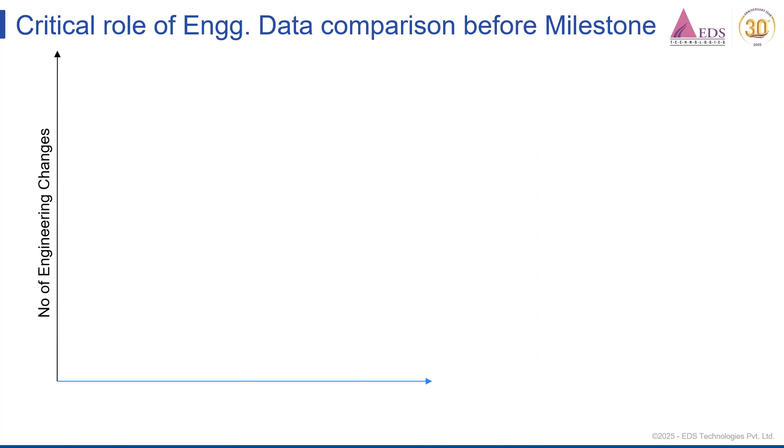I will take you through today's topic of the discussion about XCompare. We will do a technical presentation for that, and it will be followed by a demonstration on the tool by Pranay. So let's start. Yeah, so we will see what is the role, how is the role critical of the comparison for engineering data before the milestone releases. So on the y-axis we have a number of engineering changes in quantity, maybe 100, 200, and on the x-axis we have product design maturity gateways and stages.

So usual gateways are like product confirmation. Then we have virtual 0, virtual release 1, virtual release 2. Final data judgment, that's also called tool kickoff, validation prototype, production prototype, and SOP, that is start of production. So as usual, in any product system, we have these milestones where we have to have certain maturity of the data. So as you see, this is an important milestone in any engineering data or in the release. It's called tool kickoff or the FDJ. So it's everything digital here and everything physical afterwards. So this is a very important milestone.

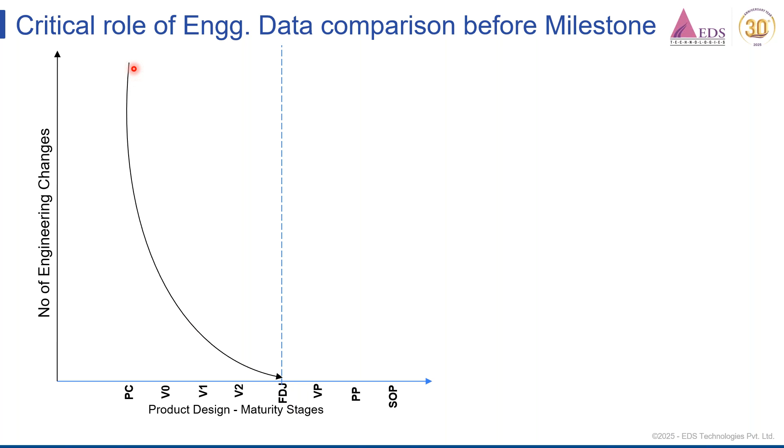All our changes are supposed to diminish as and when we approach the FDJ. That is a normal expectation, and it's a very important expectation. It is usually expected that all changes should diminish, should settle or close or resolve by FDJ. And then with that, we go for the actual tool production and prototyping, etc. However, it's a very idealistic condition.

So we have on another axis the cost of incorporating a design change between these milestones. So we see the graph is the other way. If we have to incorporate any design change at the very early stages, you will consume very low cost. But as and when you have more changes after FDJ or tool kickoff, we'll see how the changes appear. So the cost of incorporating a design change is really substantially very high once you pass this gateway.

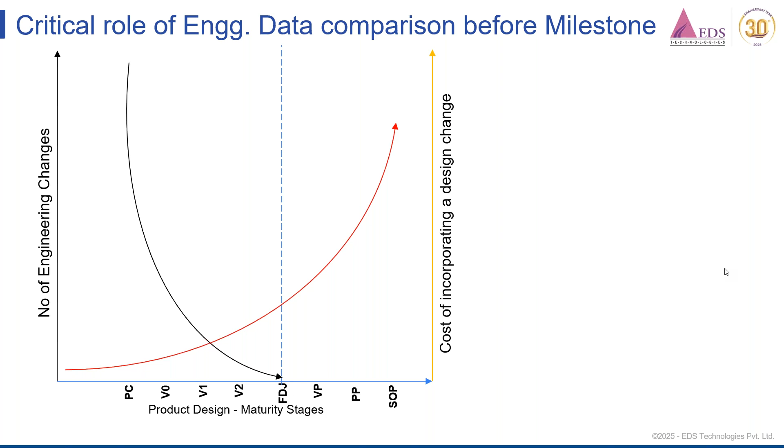So XCompare will help you quite a lot in this digital phase, where the trend curve is expected like this, not like this. So we'll see how we can achieve this important phenomenon with the help of XCompare. We'll see what are the sources of engineering changes.

There can be some leftover design decisions which are not judged very important in the early stages. Such design decisions are then multiplied and they become very big in nature. There can be some packaging surprises, and the packaging surprises can become bigger. The item LWH or the box sizes can shrink or can become bigger. That will be a big surprise.

Then there can be a lot of attribute changes. Maybe you are targeting Indian specific markets, but now there is a decision from the management that you target South Africa also, or maybe Europe or America. So then certain changes come into your product design accordingly. Then there can certainly be regulatory changes, some regulatory failures may occur. You have to reiterate your design, make the changes, and then fulfill the regulatory demands. These changes can appear due to that.

And also due to crash, durability, NVH and many other things, there are recurring changes that always come in the design that we have to meet. So in all these we have to compare the previous design with the new design, where the XCompare tool will help you in great detail. Apart from that, cost reduction is always an ongoing activity in any company, where you study previous data and new data and find out ideas for cost reduction.

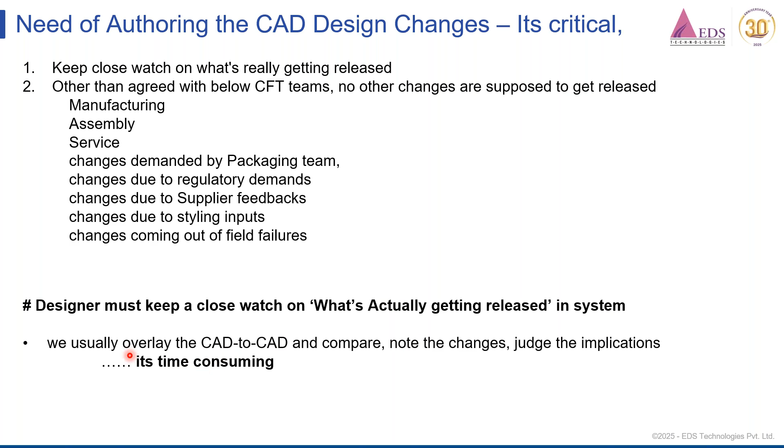How we usually do it is we overlay the CAD for a CAD to CAD compare. We overlay the previous CAD and the new CAD and compare them, note down the changes in the new design, judge the implication of that design change, and then go for actual tool corrections, etc. But it's a highly time consuming activity. It's a subjective activity. One component will take a certain amount of time, and 100 components will take 100x time. So it's not a good scenario.

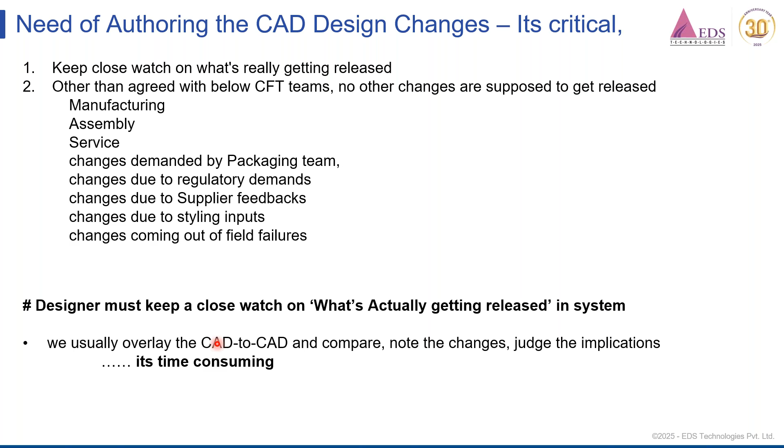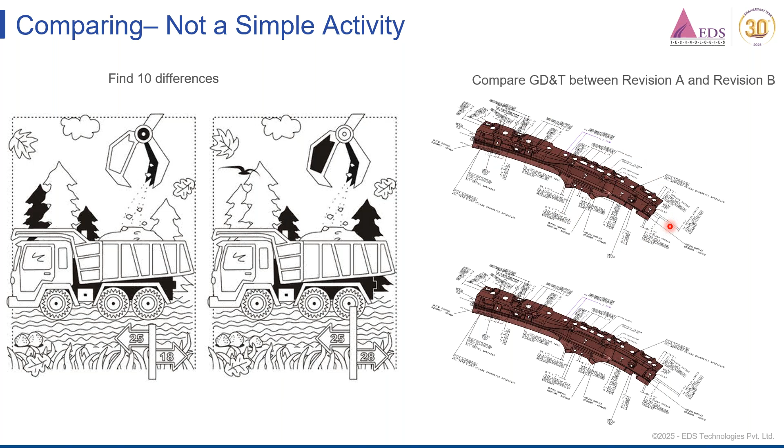That's for a simple drawing, but if you have to compare an engineering drawing, where there are a lot of geometrical callouts and intricate shapes in the component, then comparing becomes a really tedious and time-consuming job. And a lot of errors can also happen due to the large volume of checks or comparison elements.

Similarly for drawings, if I have another drawing with a revision A, the first one is the new release. So this is new, this is old. If I have to compare them vis-a-vis, I have to compare each and every dimension of the view successively and find out the differences. But that's not a smart solution. XCompare can provide you that smartness to compare automatically and give a dynamic report where all the changes will be brought in front of you.

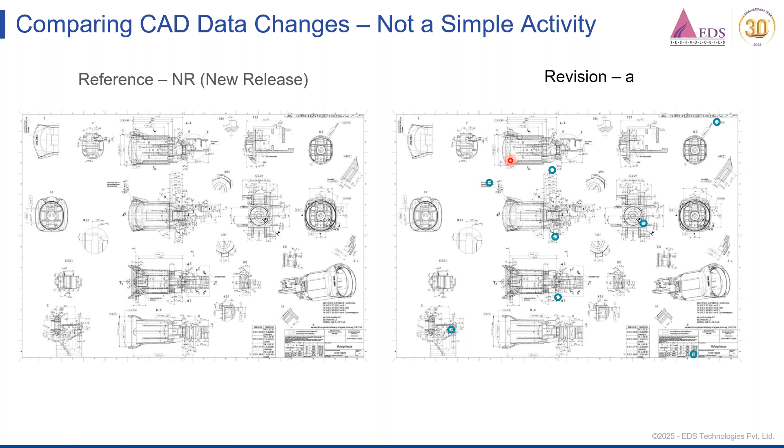Similarly, XCompare can be used for assemblies. Assemblies may be very small scale or very large scale, up to the vehicle integration level, where you are integrating different aggregates, for example the powertrain, the body, the subframe, the electrical harness. There the complexity really increases, and vehicle integration engineers are really stressed due to that high amount of data.

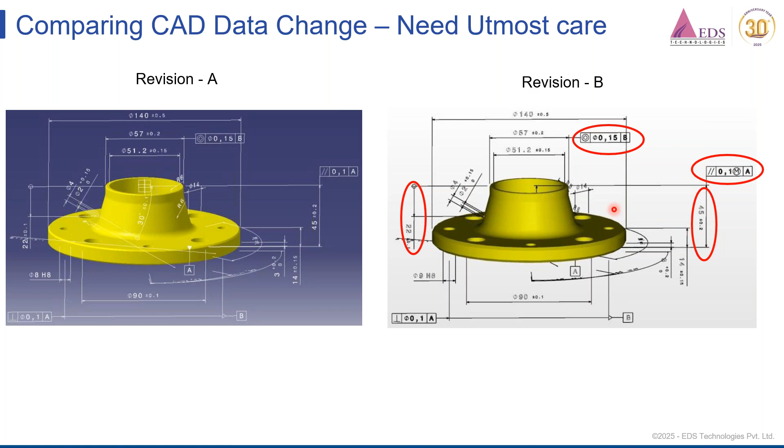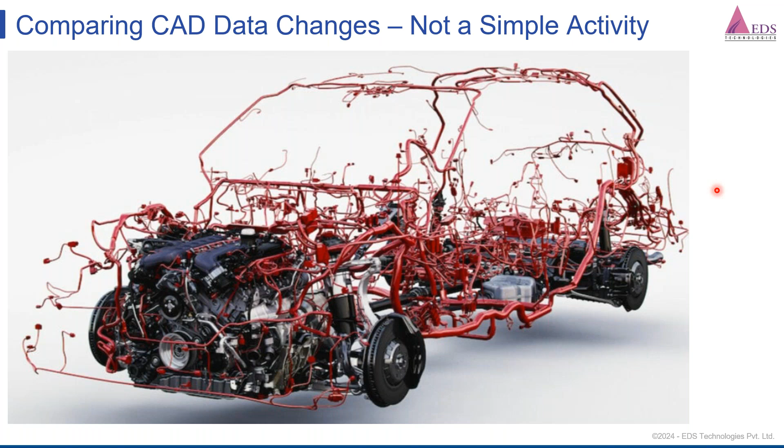Now the complexity greatly increases if it's at complete vehicle level, for example, the harness, the main bundle, the sub bundles and the branches. It becomes a nearly impossible activity to compare and see what the changes are with the new release. There can be some changes in certain areas, but how to find out? Not just by overlaying, but by using Xcompare, we can really make our life easy.

So there are some typical use cases where we compare the data with the previous revision. For example, the 3D master, where we compare release by release and version by version CAD data to know the changes. We also compare when we go for design reviews. We always have to have a good idea of what design changes we have made in our releases. Then when we give any data to tooling departments, we have to compare it with the previous revision. When an OEM gives the data to a supplier, the supplier is also supposed to make comparisons with the previous version data.

Then of course in the redesign of parts, where you are remastering or reverse engineering the parts, you have to compare the data to 100% geometrical accuracy, and then you go forward. And there are some data translation issues that may also arise. We'll see a couple of them in the successive slides.

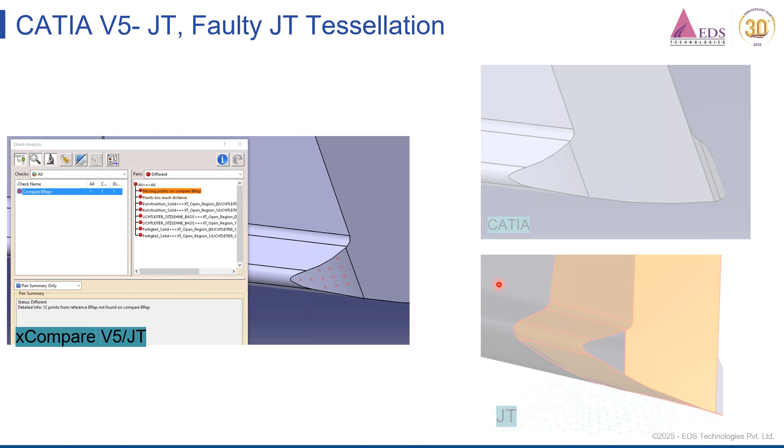So Jupiter Tessellation, what we call JT, is a great tool. It's really lightweight, but it has certain drawbacks also. Not all the time does it work 100%, because for this particular element, which is curvilinear, JT tessellation can make a flaw here. It can leave this empty. Such errors can be noticed with the help of Xcompare.

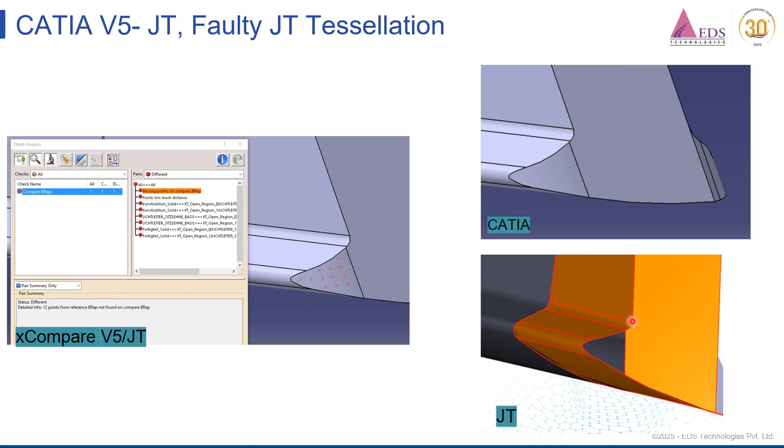Similarly, this is again this area. Once this CAD part is converted into a JT, it will not be converted 100%. Some stray surfaces will pop out in some areas, which is not a good condition. So Xcompare can easily check these flaw conditions here.

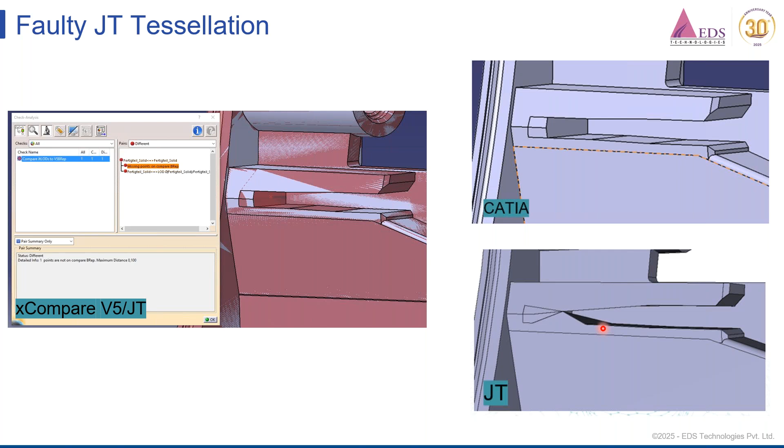Again, this slot here looks like an injection molded component, but due to JT tessellation, the data has become unwanted or some different form, which is not the correct data and can't really be used by any supplier. So we can always compare the data this way, to see whether JT has made any problems to our data. So that comparison is very important.

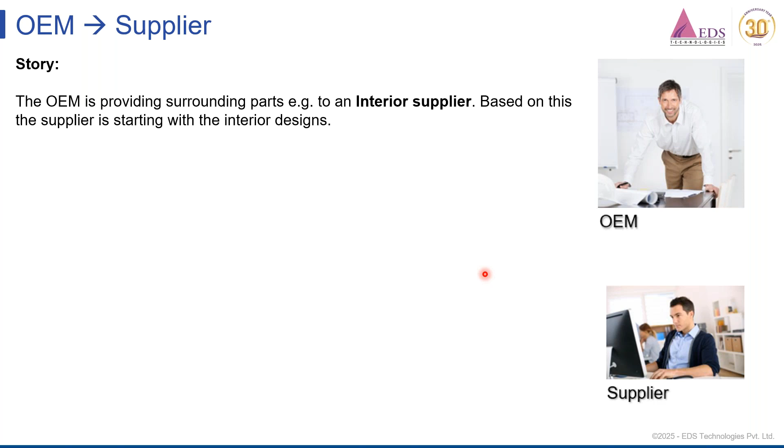Again, we'll see one slide for when an OEM sends the data to a supplier for their designs. The usual task of the supplier is to identify the changes between the current data and the new data received from the OEM, then get a clear idea of how many components are added, removed, and if their position has moved. They have to get a good idea of that. Estimate how this affects their interior design, that is the judgment stage, and whether there is any major positional change in the data.

All these changes take time if we do it manually. But if we do it with the help of Xcompare, it can really make our life easy, and it can be done extremely fast, unlike the manual process.

Similarly, for remastering, as I said, there can be some remastering errors where we have to compare our legacy designs to new versions of CATIA or NX, and we have to remaster the scan data to make a parametric model out of it. So we have to 100% match the scan data accuracy with the remastered model, where Xcompare can really help you meet 100% geometrical compliance with the scan data, or even with your legacy CATIA V4 or NX data.

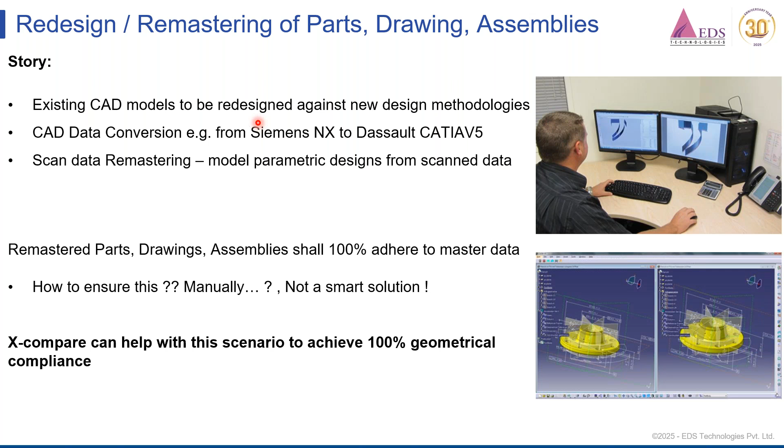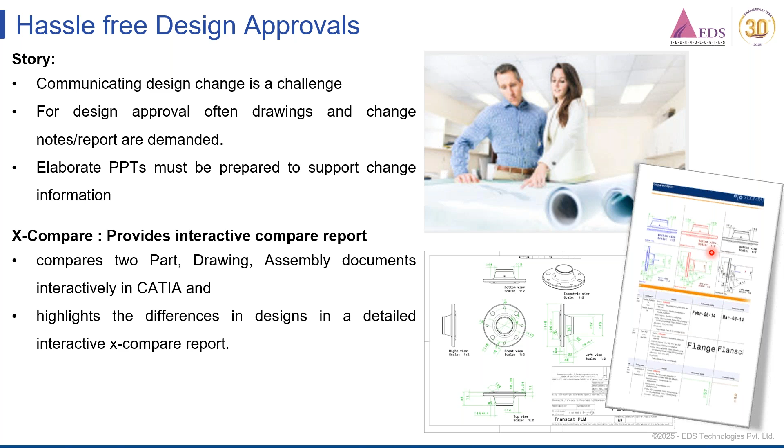But with the help of XCompare, you can generate such beautiful presentations and reports automatically out of the application, nicely staggered, nicely formatted, and then you can attach these to your design change approval sheets, and you can face those meetings quite confidently with the help of the XCompare application.

Some examples we'll see; however, Pranay will take you to the actual presentation. So we'll see what the typical checks are. Here, what XCompare does is it brings two screens before you in a staggered way, and it compares. This is the old revision. This is the new revision. In the old, it was aluminum material, and it is iron in the new version. So XCompare can really compare, and it can find these differences in the structure generation and in the assembly also.

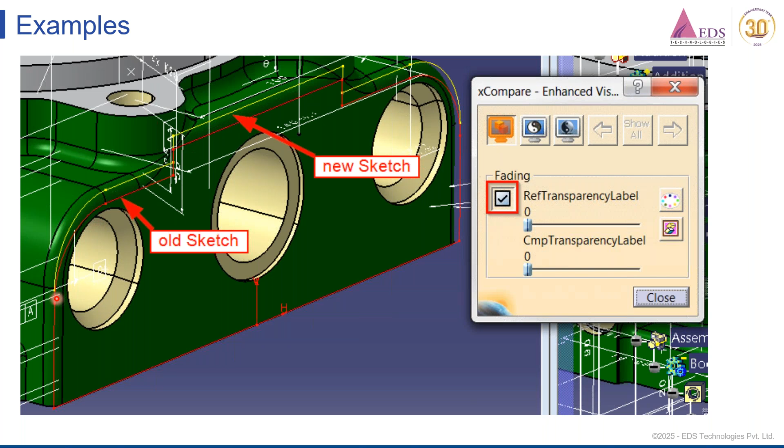Similarly, there has been one sketch geometry change. For example, this yellow and red. The red is the old and the yellow is the new. XCompare can overlay these onto one another automatically, just like the way we do, and it can give you a good idea how the sketch has changed over the releases or revisions. Again, if at any point while creating the sketch any geometrical elements have changed, even that data comparison can be provided with the help of XCompare.

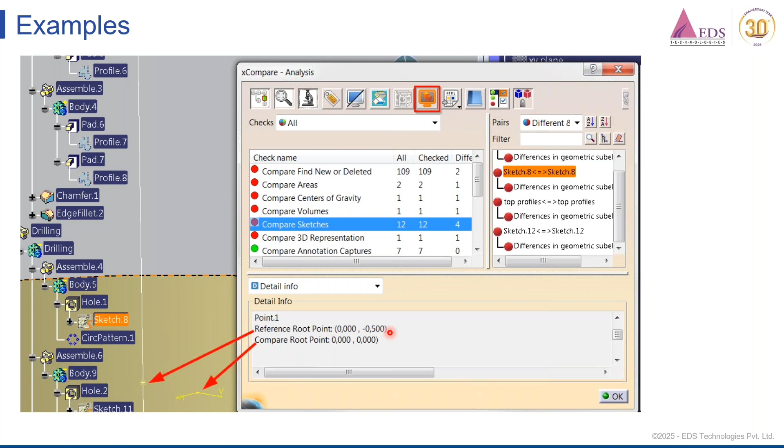What it does is, just like we overlay the designs, XCompare can give you an overlaid stage populated with color codes like yellow and green here. Green are the missing in the reference, and yellow are the new in the compare module. So these changes are available, and you can switch off the nominal geometry and just see the additions and deletions right on your CATIA screen for better explanation.

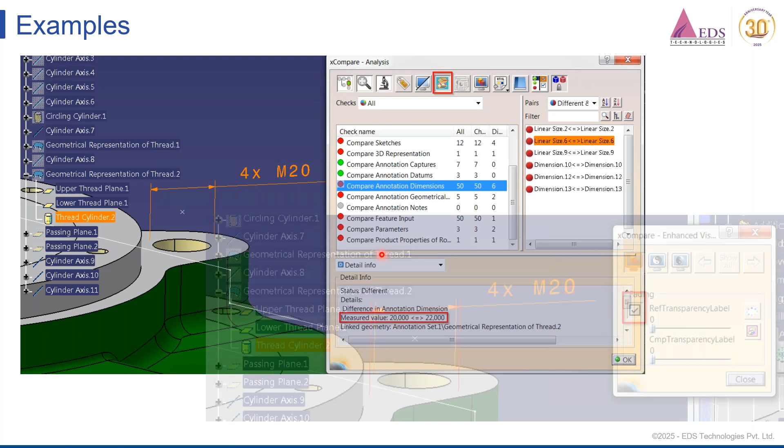Again, here we see it's also equally important for geometrical tolerances. It can compare your tolerances. For example, this hole in the new revision has been made 22 diameter. However, it was 20 mm in the previous revision. So such changes from revision to revision can also be mapped with the help of XCompare. Again, here we'll see there are 4 holes of M20, but they have been made M22 in the new revision.

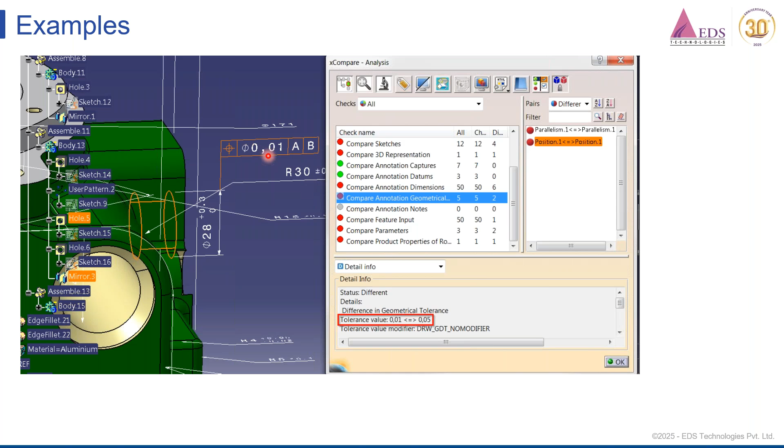So it's an extremely smart solution. It's a very fast application. It compares the data quite accurately, 100%, and with great speed. Again, this thread depth was 22 in the new, and it was 20 in the old revision. It can check blind hole depth also.

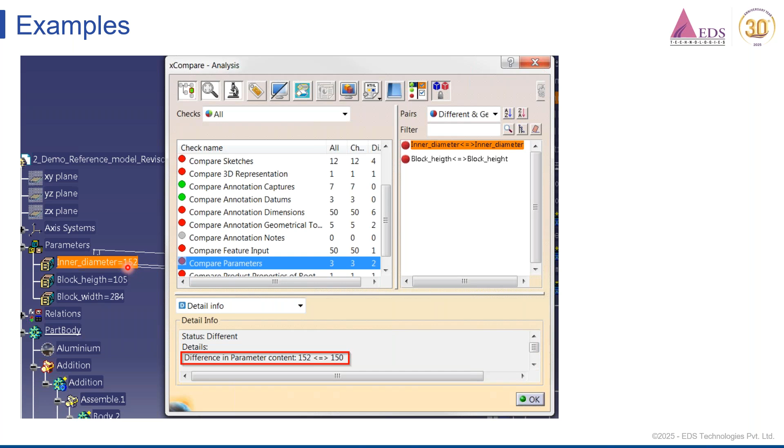Even not just the geometrical data, but the parameter data it can also check. Like this parameter of inner diameter was 152 in the old revision, and it became 150 in the new revision. So such changes can also be tracked with XCompare. And at the end of the comparison, there are some readily available reports which you can run and see. What we are looking at is a three-dimensional HTML report. It works on all browsers.

In the browser itself, you will be able to zoom and rotate the model. You can cut sections of the model in the principal axes. You can zoom it, rotate it, and know the changes right on screen without any need for a CAD tool. So it works on a general browser like Internet Explorer or Chrome.

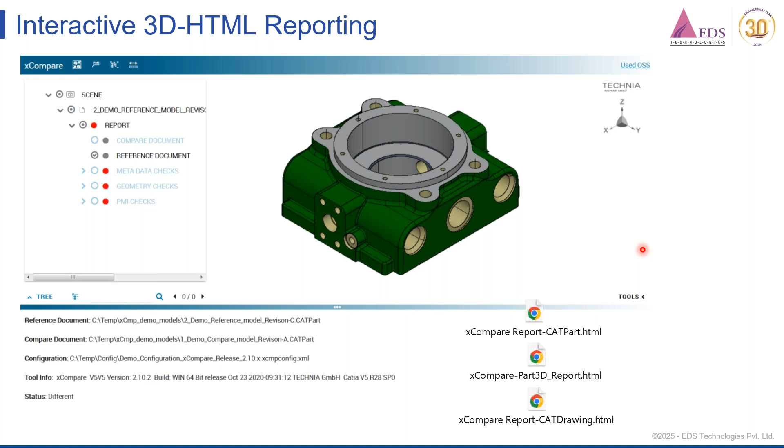So with this, I will hand over to my colleague Pranay for the demonstration part of the application. Over to you, Pranay. Yeah, thank you, sir. Thank you very much.

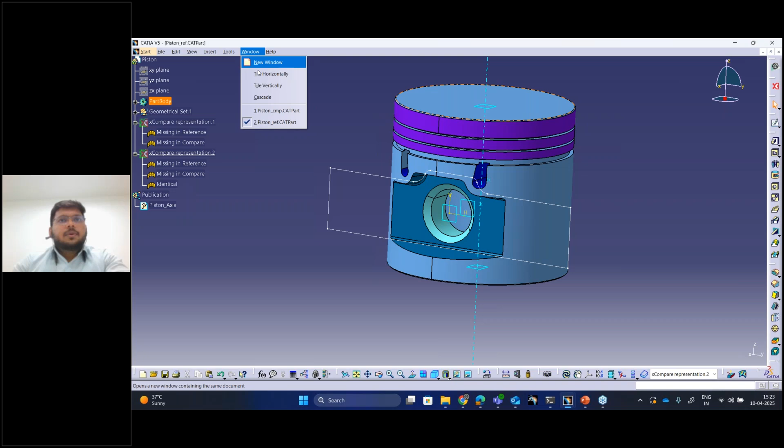What I will do is just make it tile vertically. This is the piston CATPart. This is the reference and this is the compare. I will explain what the reference and the compare actually are.

I will go here in this toolbar and launch the XCompare. A user-friendly dialog box will appear at your end. This is just an interface of XCompare, how it looks. You have to go here in the XCompare and specify the documents which are the reference as well as the compare.

The reference will be the old CAD part, or I can say revision one, and compare will be the new CAD part, or new document, which I can say is revision two. So we have to browse the documents here.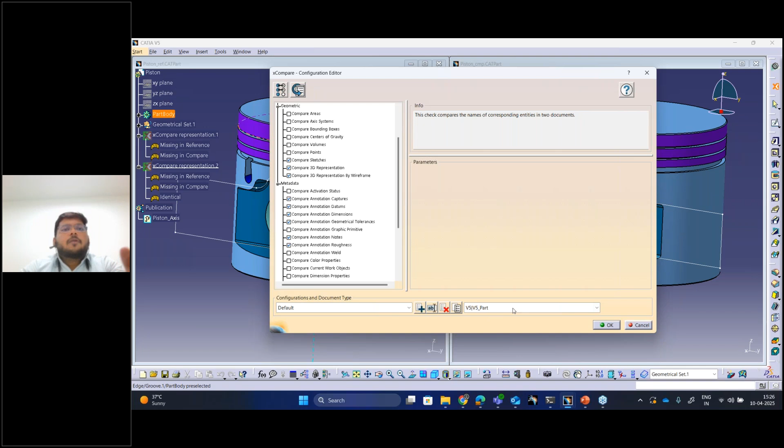After selecting the number of checks you want — for example, out of all of this you've taken a certain amount, let's say 10 checks — you do that whole set, then save it and click OK. That many checks will get activated here, and after that you click OK to start the comparison.

I have chosen these two cat parts here, and I will click OK. In just a couple of minutes, you will have the report as well as the comparison results. So it is now comparing both the documents, both the piston parts.

So it is a familiar tool. You will like it, it will take a day or two to get hands on it.

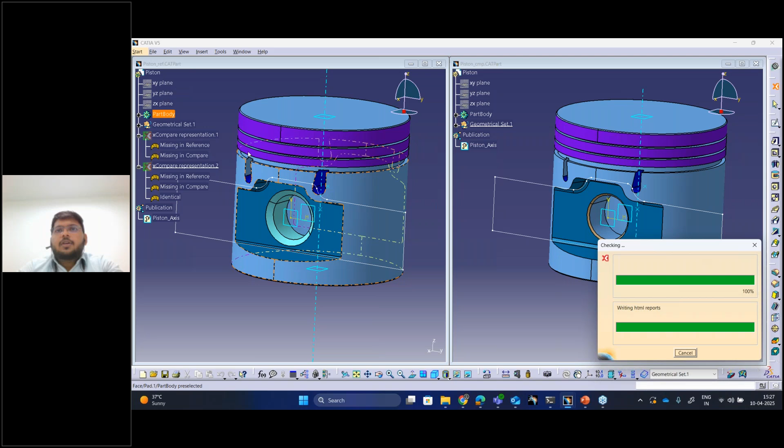Okay, so this is the result. After the comparisons, you will get all the results here. These are the checks I have checked in for that configuration, and here I have got the result. In this check you are able to see all equal, different, and general error. Now all the checks have appeared here.

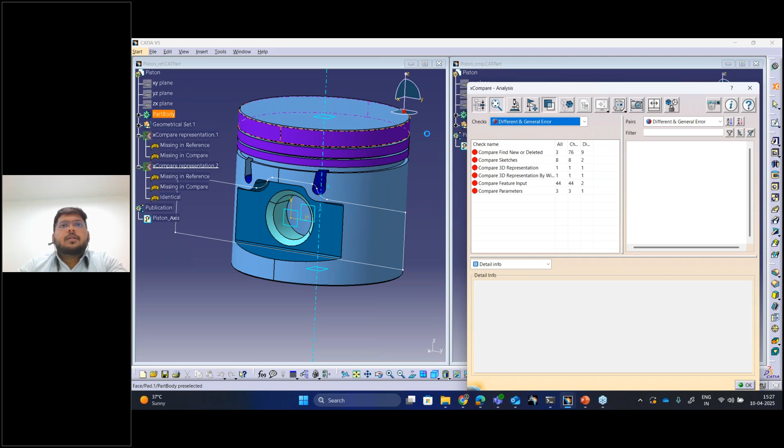If you check equal checks, if there are any equal checks that the tool got between the reference document and the compare document, the equal part, like the geometrical set, will appear as green here. And if there are different checks, like different comparisons or geometrical checks, we can differentiate from here. So these are the differences that Xcompare found in both documents. I will just take you through this.

Okay, so here I have both the documents open. I will just check it, make it transparent, and log it. So here for example, the first check I have here is compare find new or deleted.

So whenever Xcompare is going to compare, for example, the thickness, you are able to see that thickness 1 is present in the reference document, and it directly gets highlighted here. You can also check that whenever I am moving this part, the compare part or revision 2 is also getting moved or panned. So this is a feature of Xcompare.

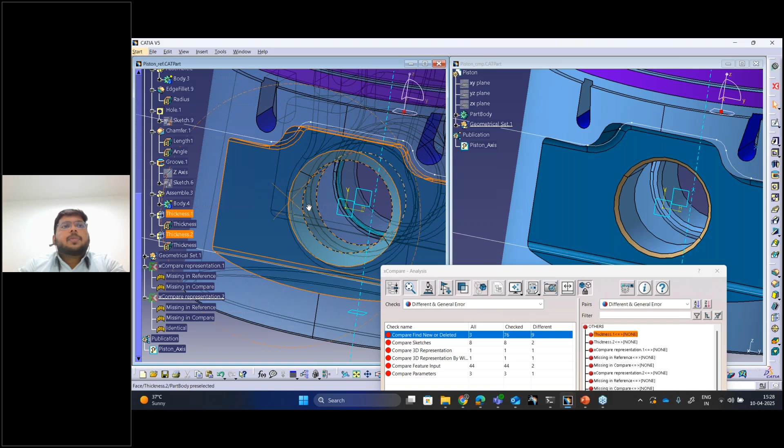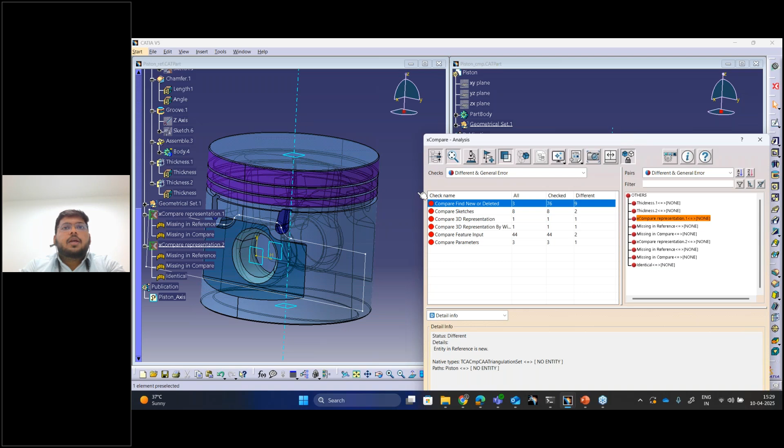We are able to see that this thickness 1 is present in revision 1, but not in the new document or new revision. It is thickness 1 here, and none represents that there is no thickness present. Similarly we have thickness 2 here, and Xcompare represented that as the geometrical set. This is the geometrical set we have in the compare reference document, but not in the compare document. If it is there, it is going to be highlighted here directly.

For missing in reference, this is another geometrical set which is present in the reference, the old cat part, and not in the new one. Similarly after the checks, detailed info will be present in this dialog box. Entity in the reference is new, which means the geometrical set is present in the reference document but not in the compare document. So these are some compare find new or deleted geometrical sets which we got here. Whenever you click that, the representation will be there.

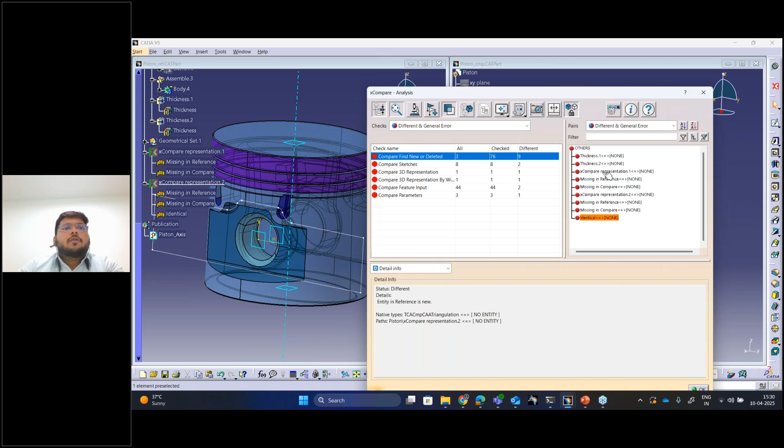Then we have the compare sketches. In compare sketches, for example, Xcompare is saying the check name compare sketches and check status is different.

Pranay, we are not able to hear you. Pranay, we can't hear you. Hello.

Yeah, please go ahead. Sorry for the disturbance, okay.

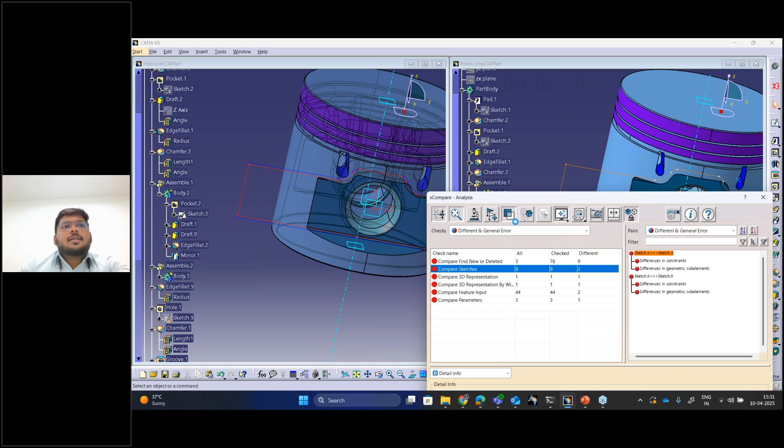So yeah, this is the compare check. So here I have this, for example, just a second. Okay, so let's compare and check the result, and you're able to see that the red one which is showing here is in the compare document, and the blue one is from the reference document.

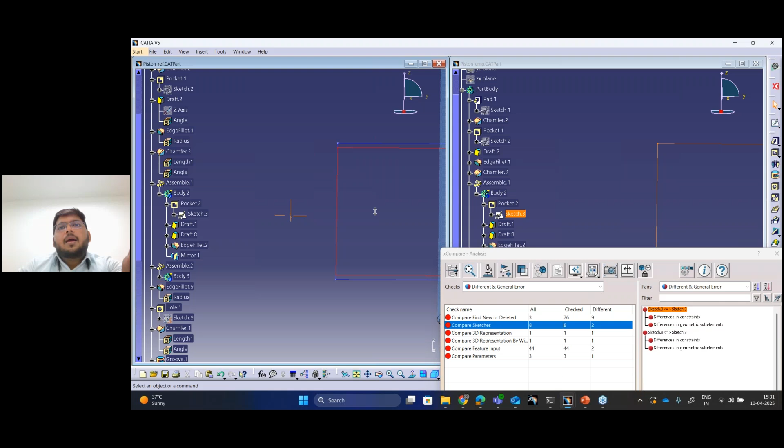So certain changes are there, revision changes, and compare found it. I can say the height or the length of this sketch has been reduced in the new revision. If it is done intentionally, then there is nothing to worry about. But if it got changed unintentionally, by mistake, you can rectify it, you can correct it. So this is the advantage of compare.

Then afterward we have the differences of constraints. Certain constraints are in difference here.

For example, it is highlighted here, and we also have these differences in geometrical sub elements. Okay, so you're able to see these certain elements which have been highlighted. Then in sketch 8, we have certain differences. For example, you are able to see here, let's see, this is the sketch.

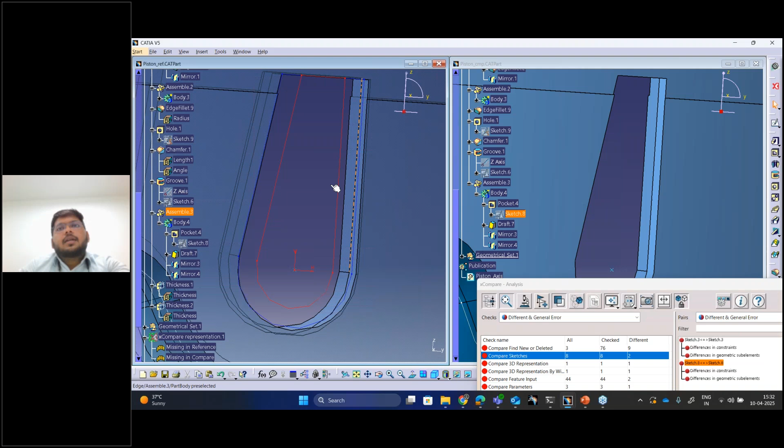Just a second. So in the reference, that is the old cat part, we have a bigger pocket here, okay, this. But in the new revision, it is small as compared to this old one. So the blue one gives us a representation for the old cat part, and the red one represents the measurements for the new revision, or the compare document here. So this is how it gets highlighted.

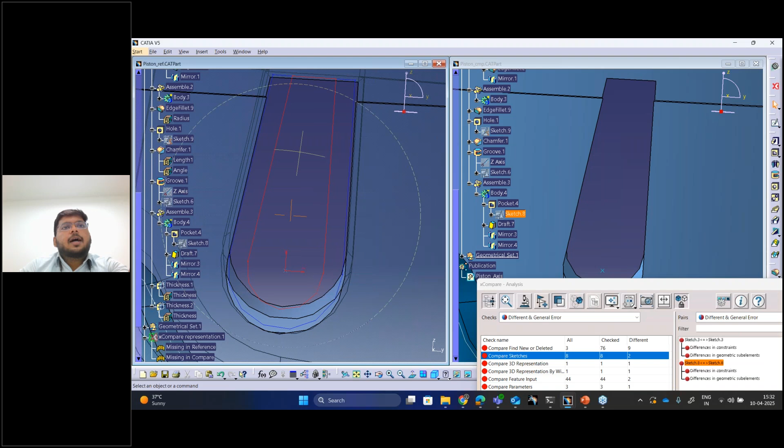In this part, actually directly in the part that is being seen. So this is one of them, then we have this compare 3D representation. See, for example, you're able to see what we have done for pad, pocket, and all the features we have applied. So in this old CATPart, we have a bigger height of the piston, but in the new cat part, or the compare document, the height is reduced. So directly it will be demonstrated in this cat part. The red one is for the compare, the new document on the new cat part. The blue one shows us the old cat part.

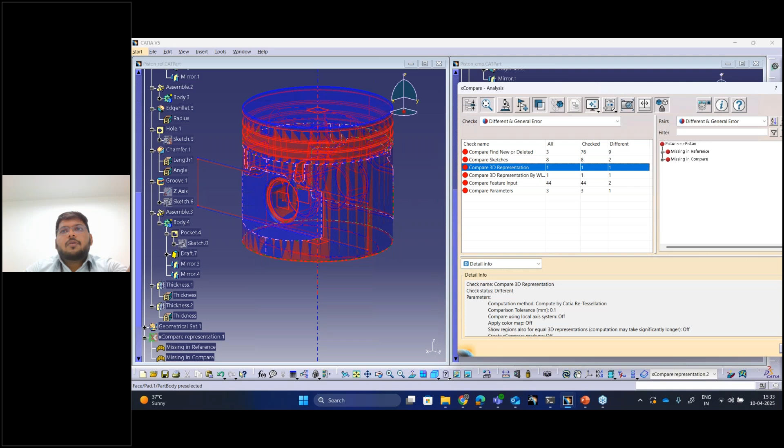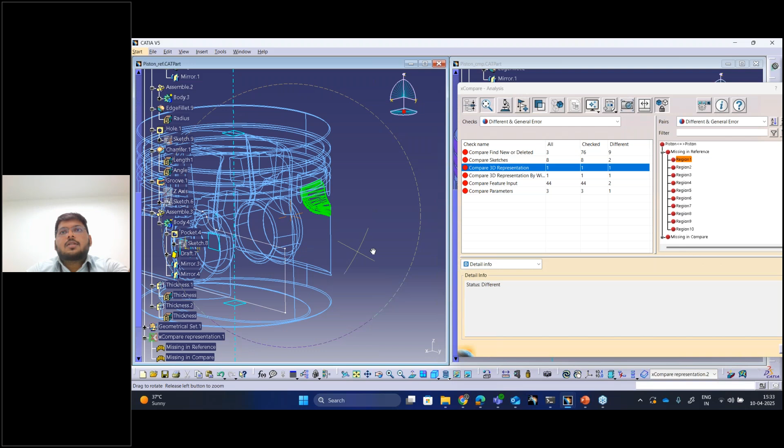So if I want to see what parts are missing in reference, these are the regions, for example, missing in reference. To show it, I will just toggle this, so I have to go to wireframe. So this region is missing in the reference part, the old cat part. Okay, so another region, region 2, this region is missing in this cat part, old one. This third region is missing also. And many more, for example, here it is found that 10 regions are missing in this reference document. So this one also.

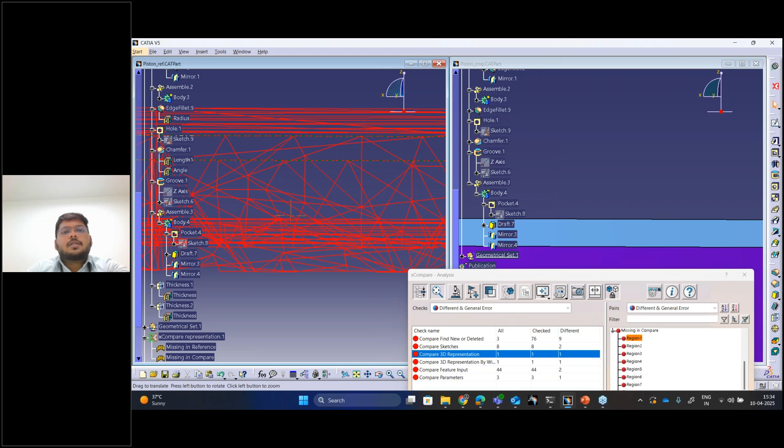But there are also certain regions which are missing in the compare as well, so we have also got the result for it. What I will do is just go here and write. So as I told you, the red highlights the new revision. So this region, for example, if I just zoom in here, you are able to see that this height is more compared to this one, of thickness applied, or it has been pocketed. The height has been reduced here. You're able to see, for example, if I just toggle to the view, so you're able to see, you can see the difference between the heights. xCompare has highlighted that as well.

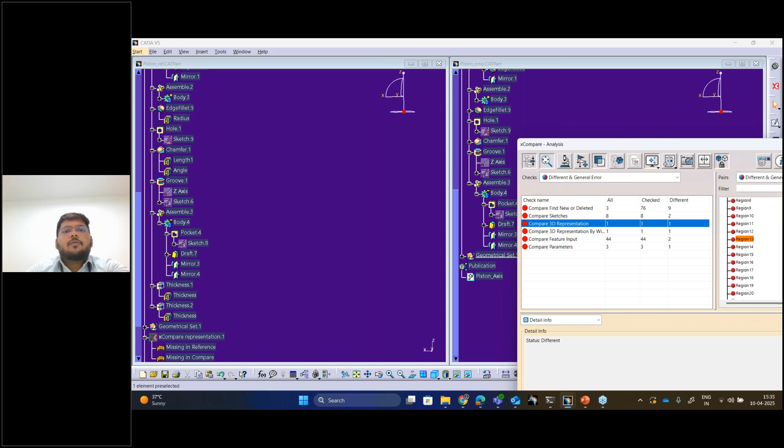So this is another advantage of it. As many as 28 regions are not present in the compare or the new revision. As soon as we check, the region will get highlighted. To see it, just you have to go to the wireframe.

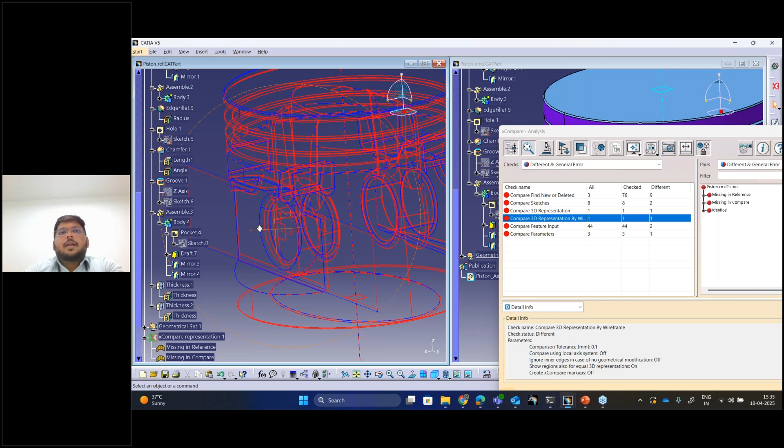Then moving forward, we have this 3D representation by wireframe. So this is the representation we will get in the wireframe as well, similar here also. The blue is for the reference and the red for the comparison. If we get missing in the reference, this is the region which is missing in the reference, this one also, and up to region 10, there are several regions missing from the reference document. And for the compare as well, we have a total list, it has identified 85 regions which are missing in the compare or the new revision.

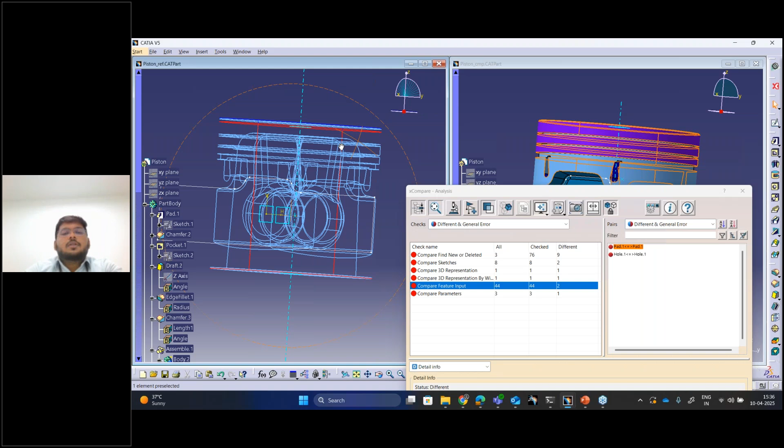So moving forward, we have the compare feature input as well. So this is the pad, the thickness is reduced. Then in the hole as well, whatever I will just make sure and move to it. So the diameter here has been reduced in the revision, and you get it directly highlighted here.

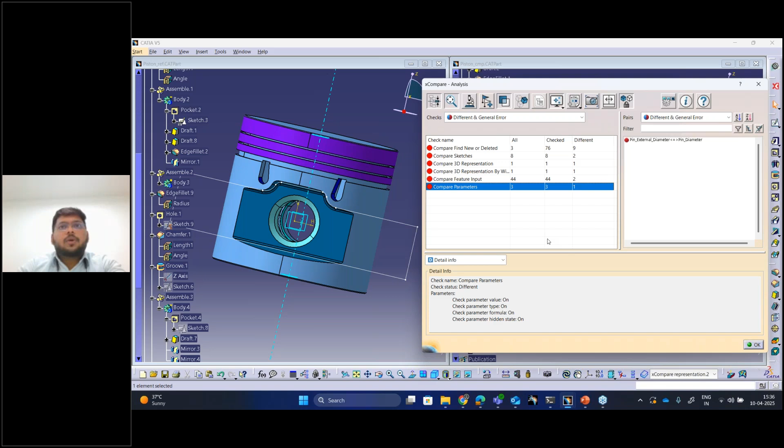So yeah, this is the results for it. Okay. Also the parameters related comparison has been there. But the new and the most advantageous part of it, for example, if you want a report of all these checks, okay. So Xcompare will give us a report as well.

For example, we will get two types of report here. One is the HTML one and another is the 3D XML. Okay. Here we have this option for HTML report as well as the 3D XML. So just click here and the report will get directly opened in the browser. So you can see all the necessary things here.

For example, where the compare part is located, where the reference part is located, where the configuration file is, then the date and time of the check run, also how much time it has taken by the software to compare both the parts. Okay, then properties of both the parts or both the files here, and also the Xcompare versions as well. So the list of checks I have checked for the configuration file also gets inputted here.

Okay, we have all the list here as well, and also a detailed analysis or detailed report related to checks as well, or comparisons. For example, one check is compare CRC. So here you have the result at different checksum. This comparison calculates the number of geometrical set elements or the parts here. Okay, if they are different, we get a status as different. Okay, both documents have different checksums. The number of geometrical sets or elements are different.

Okay, also in the configuration file, we can give a parameter in the Xcompare, and we can let the software know if the checksums are equal, then we can stop the comparison. We are able to do it.

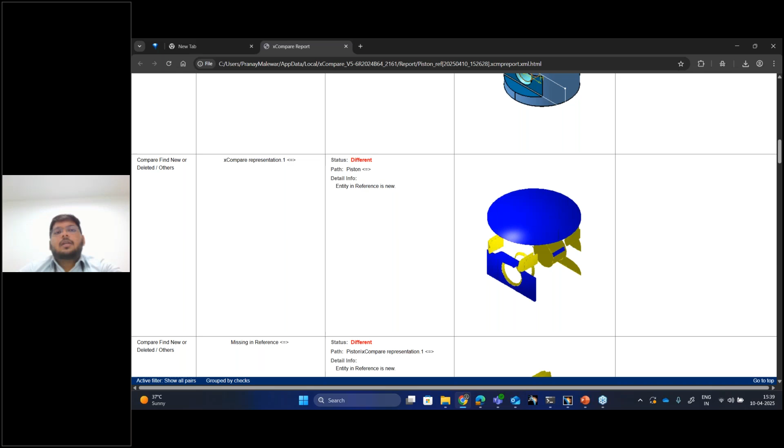So similarly for the other elements as well. Also in the compare, find new and deleted, here it is. These are the many geometries which are not present in the reference document. Okay. You can say the compare document, the revision one. Okay. So similarly here, compare, find new, deleted items. Entity in the reference is new. So these many geometries, the surfaces of the parts, are present in the reference but not in the compare document.

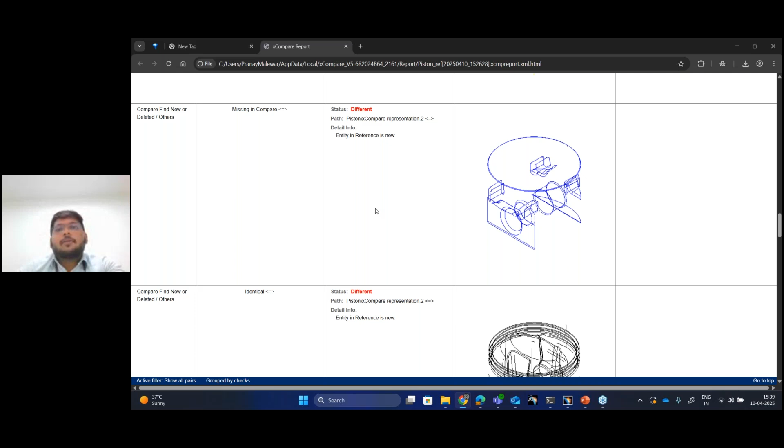Okay, so yeah, we will get a detailed report like this. For example, if you create a report like this manually, it will take a minimum of hours to create such type of report. Also we may not be able to get it like this. So yeah, this is one of the advantages of using the Xcompare application.

Okay, so here as well in the compare sketches, we have got detailed info related to the points as well. For example, I have shown you the sketch in this CATIA window or Xcompare window. Okay, and it says different, and different constraints are there. Out of 26 constraints, 2 constraints are different. Okay, so values: first here it is 18 mm, then in the revision it is 17 mm. Then here it is 13 mm. Here we have the 12 mm.

So also the starting points or the coordinates have been highlighted here. For example, for line 8 in the sketch, the reference start point is from x minus 12.4 like this coordinate, and the end point for the reference line is at 12.461 and y coordinate is 20. But in the compare document, or the revision one, the start point is this, and the compare endpoint is like this. So it has been changed. So minute details have been identified by the XCompare application.

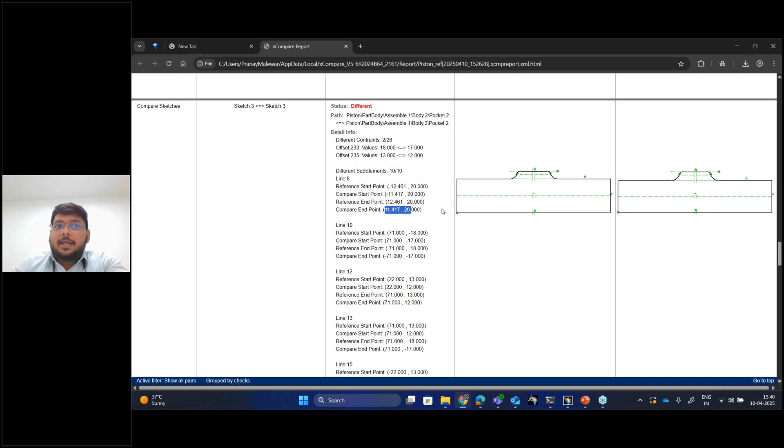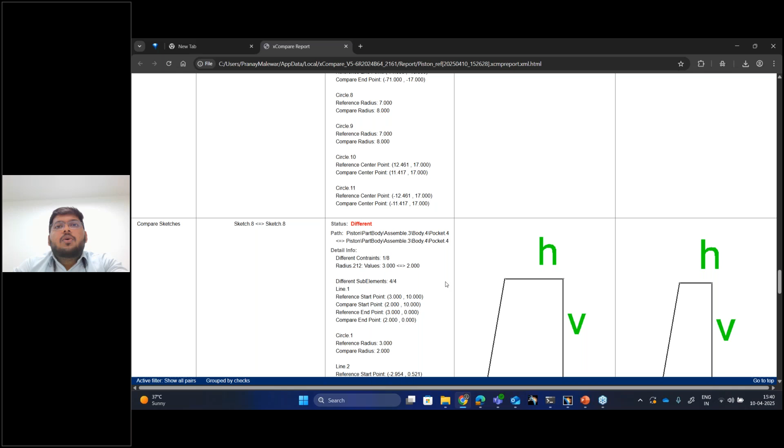Okay. Also the reference radius for circle 9 is 7. Then the compare radius for circle 9 is 6 mm. So yeah, and I have shown you the sketch as well. Okay, the pocket is bigger in the reference or the old part, but in the new CATPart it is small compared to the old. Okay, so yes, such a detailed kind of report we will get with the help of this XCompare application.

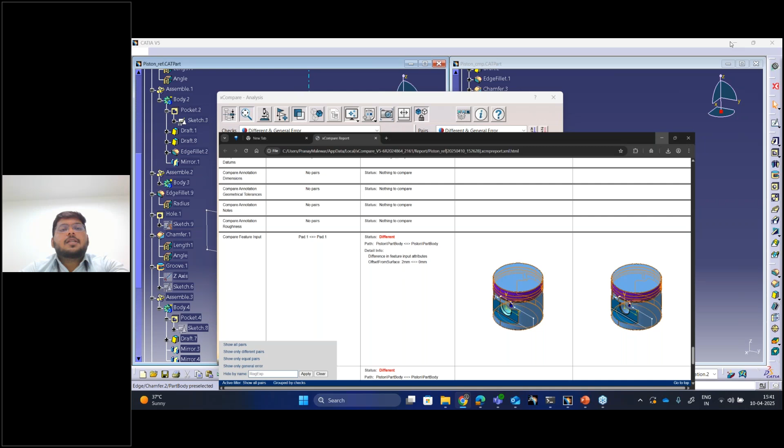So this is the HTML report, but the main part, I have this 3D HTML report as well. Okay, so I will show you.

So that report will also get opened in the browser directly. Yes, that's the 3D HTML report. You can see here that you can share this report with anyone, anywhere, in your company or, for example, your partner company. And they're also able to see this visualization directly without any of the inputs.

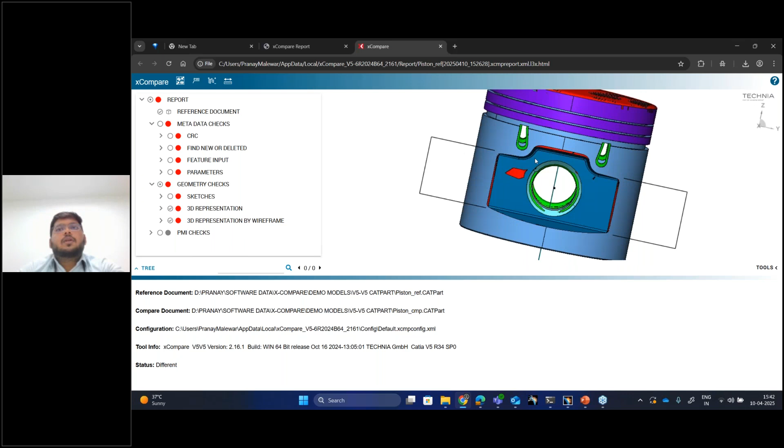So these are the comparisons we have. These are the CRC checks and related ones. All the checks have been directly identified here. As I said, red highlights are for the new revision: this surface is present in the new one, but green is for the old one. So this is the kind of report we get here directly.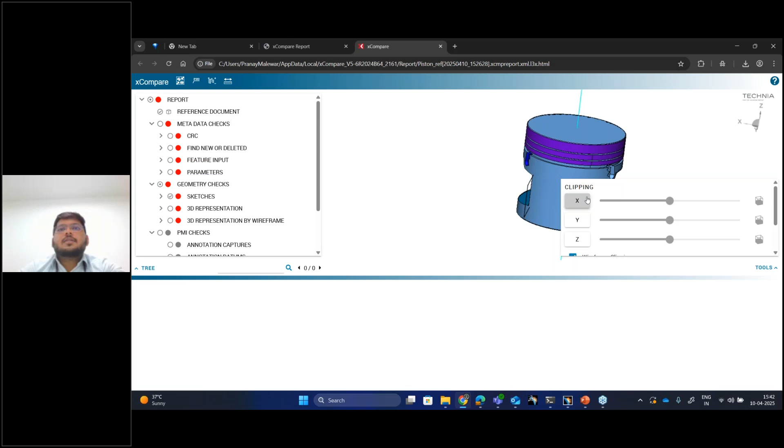For sketch as well. So this is a kind of HTML. Also, let's say here we have the tool. We can click the view here as well. For example, this is the clipping. We can see the section view here directly. We can just toggle it here. We can maximize, minimize the surface here directly. In the Y coordinates we can also do the clipping here, and the Z as well.

So this is the kind of advantage of using the XCompare application. Also, we can install the application. It will directly get saved in your download section. So this is the 3D HTML report. So we have seen the HTML as well as the 3D HTML here. We have also compared the two parts here.

Now I will show you the XCompare product comparison. To save time, I have already opened these two products here. We have these assemblies here directly. Similar to what I have done for parts, I will do it for assembly as well. I will just toggle the XCompare application, and within a few minutes, same inputs I have to give. Here I have to select first the reference document as well as the compare document. It has been selected directly, or we can browse from here. A similar process we have to follow.

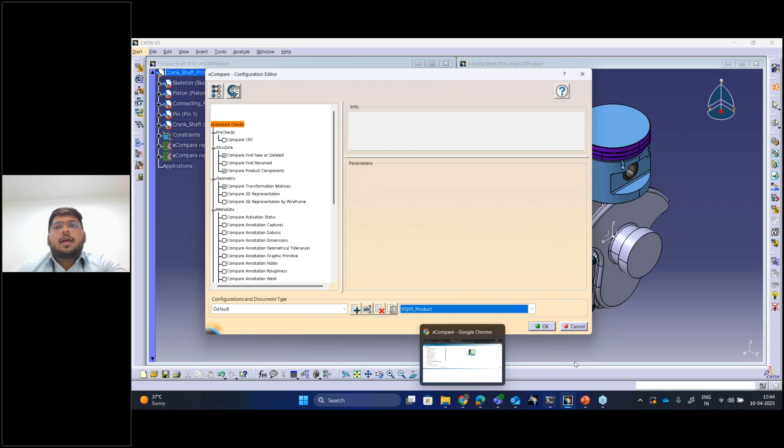After specifying the documents, I have to go and select the configuration file here. Similar process. Some checks are the same for part and product, but some are different. The number of checks varies for CATIA part comparison and product comparison. So after selecting the configuration file, just click OK, and you can run the check. And it will do the comparison. Assemblies are bigger, so it will take a couple of minutes to do the comparison between assemblies.

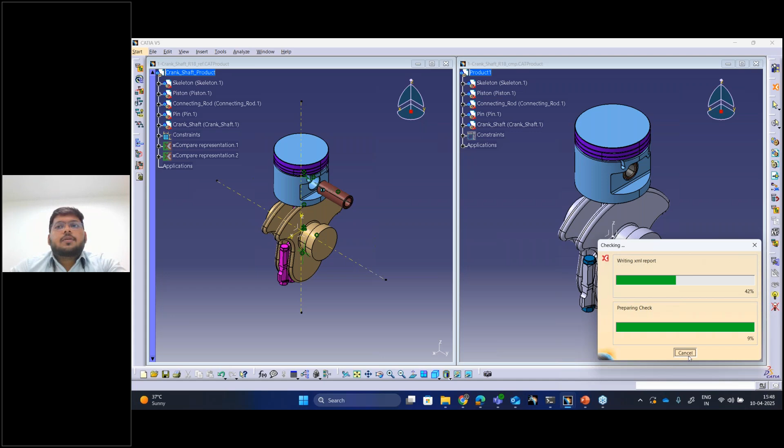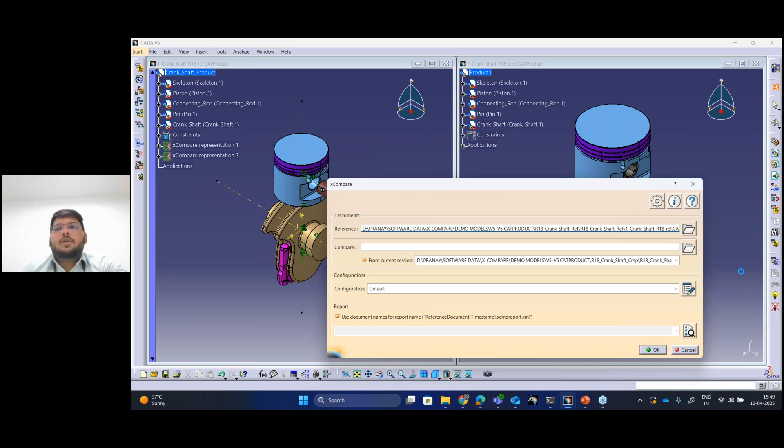Since it is taking time, I will just cancel this check and open the pre-existing check I've done for both assemblies. I will just open the pre-existing report which I have directly here. For example, if you have done the check for these documents previously and you don't want to do it again, XCompare saves that report in its file system and you can open it directly, without comparing again.

So let's see, this is the document I have here. Just open it. So yes, this is the comparison which I have directly.

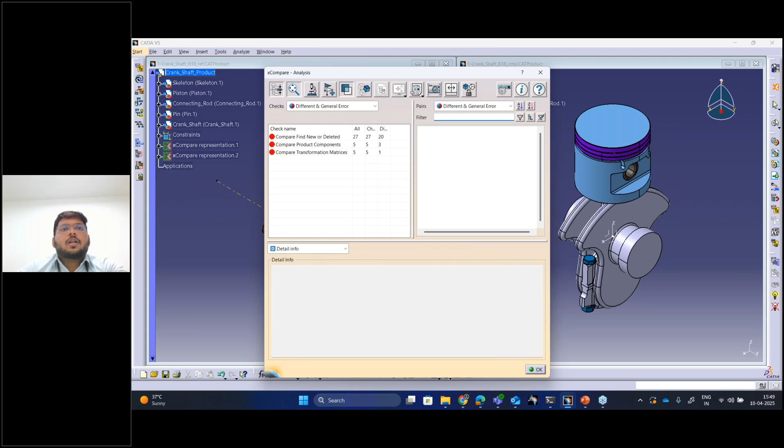Okay, in this here we have what XCompare has found. For example, first, related to the constraint check: it has found that this coincidence here is present in the reference document but not in the compare document, so it is identified as none. Similarly, we have this coincidence 15 as well. We have the offset 16. So these are the comparisons related to constraints here.

Also for the parameters here, the angle is present in the compare new revision but not in the old. It has also identified the comparison of product components. Skeleton one, I can say, is present only in the old CATPart but not in the new. Then also for piston one, for example, I have shown you this is the piston here. So this has changed with respect to the geometry of it.

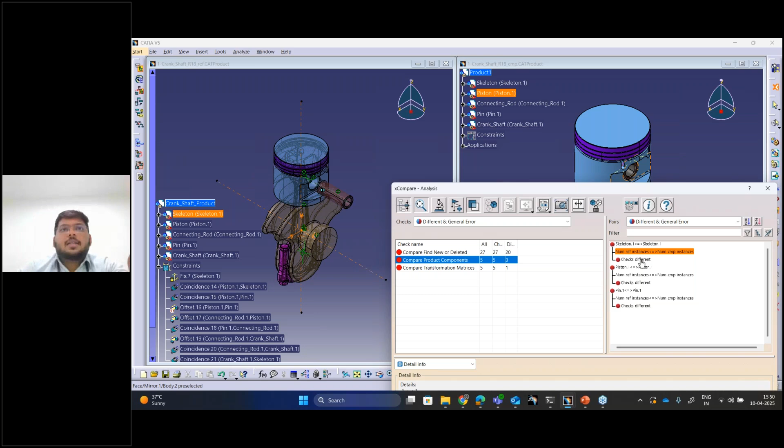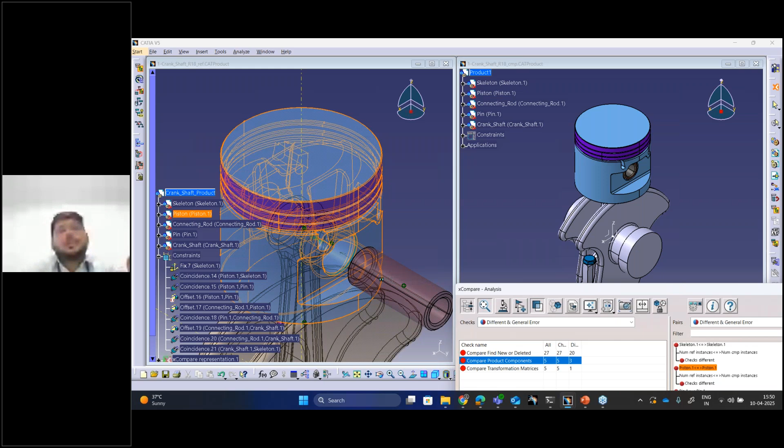Then we have the pin here. You are able to see that this pin is positioned here, but it is here again. So also, like I said, for the transformation related to pins, the pin has been considered not placed completely under the piston. But here it is different, so it can be directly identified here. So this is how the compare works.

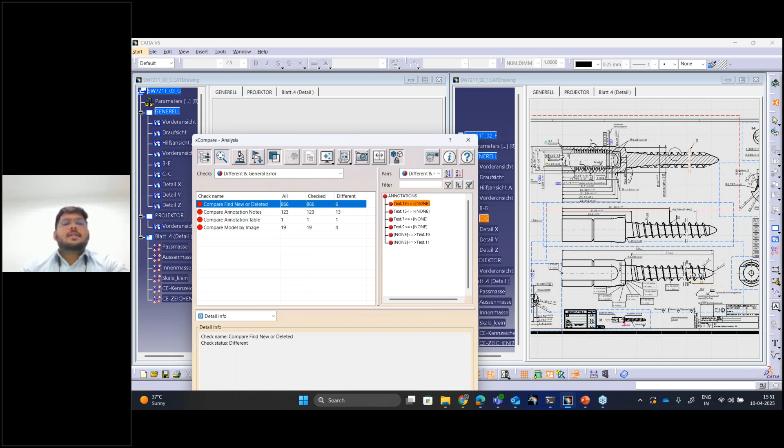So this is present in the new revision, but not in the old one. This as well. This is present in the new revision, but not in the old one. So yes, and then annotation notes also, it will compare those. This is also, just a second.

You're able to see here the blue highlights for the old one and the red for the new. The revision has been changed, from 2 to 3. So see the versions, it has been highlighted here directly. Similarly, for other checks, we have this. For the annotation table, there are certain comparisons with this table as well. Just a second, I will show you here.

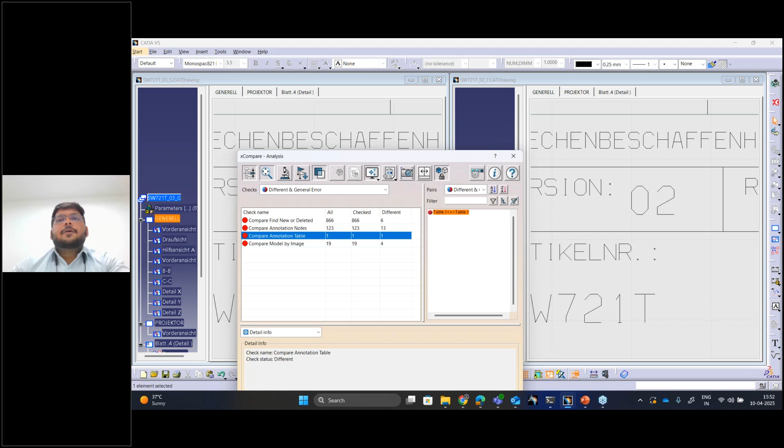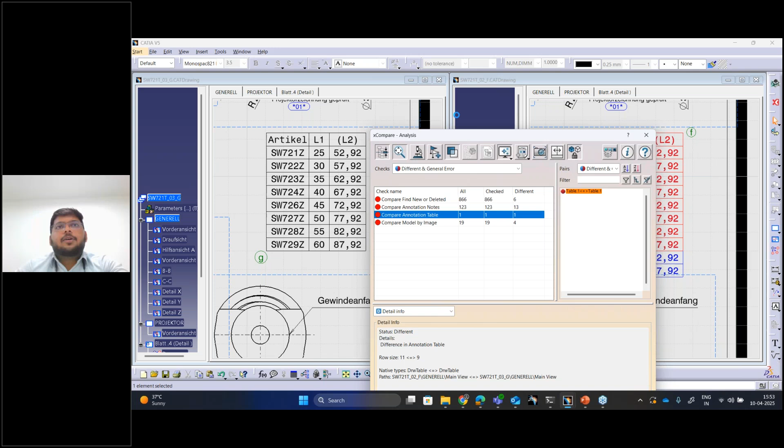So in the old drawing, we have this table with 9 rows, but in the new drawing it is changed to, sorry, for the old document we have the table with 11 rows, but for the new, it is with 9. So the number of rows has been changed. So yes, this is what it is related to XCompare. With this, I am done with the demo part of it.